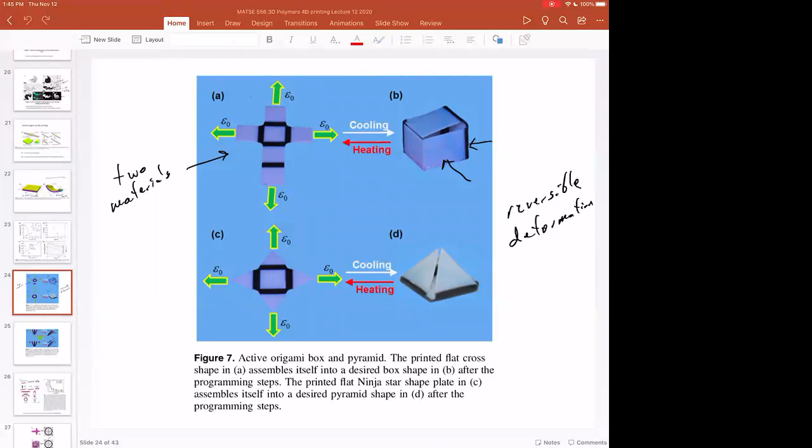And you can even start to see this in terms of phones that fold, or flexible screens, or morphing wings for aerodynamic control on advanced aircraft. These active and smart materials, this is really where the world is trending in terms of advanced products. And this is how those concepts are developed.

So this is a cool one right here, where rather than just folding up boxes and pyramids, and so you see these canonical shapes, this is a cool paper because they print this plastic airplane. It's not a paper airplane, but they print this airplane flat, and then they cool it down, and it folds itself up into a structure that can fly. And you can imagine that this might be very interesting for autonomous sensing, this might be very interesting for, say, environmental sensing.

So this is cool. And what's interesting about this specific example, if you read this, is that even something as simple as this folded airplane design has 2 opposite directions of curvature. So you have the center curvature, and they call that theta 0. So that folds up in one direction. But then the theta 90 degrees, so here, let me, right here - so this fold, or the center fold of a paper airplane, is in one direction. And then the wing fold, this theta equals 90, is in the opposite direction.

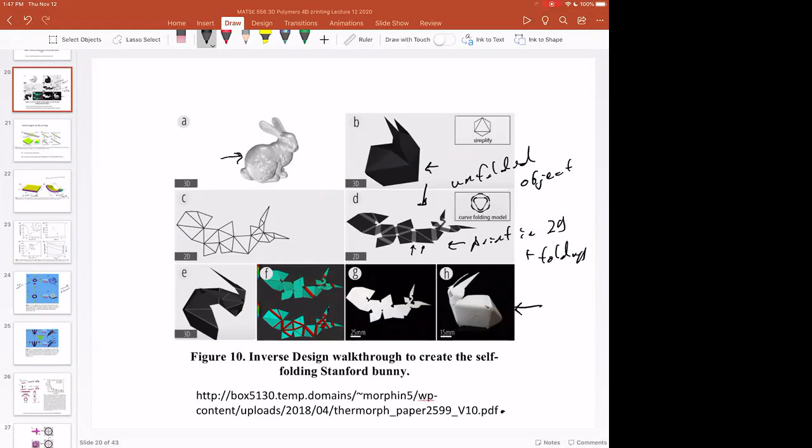So this is two different directions of folding, which is different than this single direction of folding in this rabbit example. And so there's lots of really interesting mathematics to think about what can you do with one direction of folding versus what can you do with bidirectional or two different directions of folding.

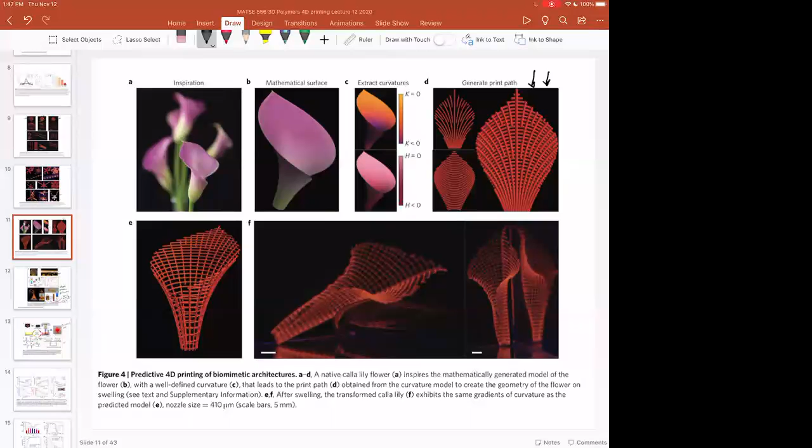And then if we go back to the example from Harvard, how do you get these complex curvature shapes? There's two different curvatures in this lily flower. How do you get that from a certain print path? And how do you get that from a flat object to begin with? So if you're interested in origami, there's a really cool Nova documentary on that. I'll try and put that in the discussion group if I remember. But this now is getting into how do you fold up complex shapes, or how do you obtain complex curvature from flat objects. And so there's a whole branch of mathematics devoted to this, and then material scientists and engineers and product designers and 3D printing engineers really make this a reality.

So that's a cool demonstration and something for you to think about as we move forward.

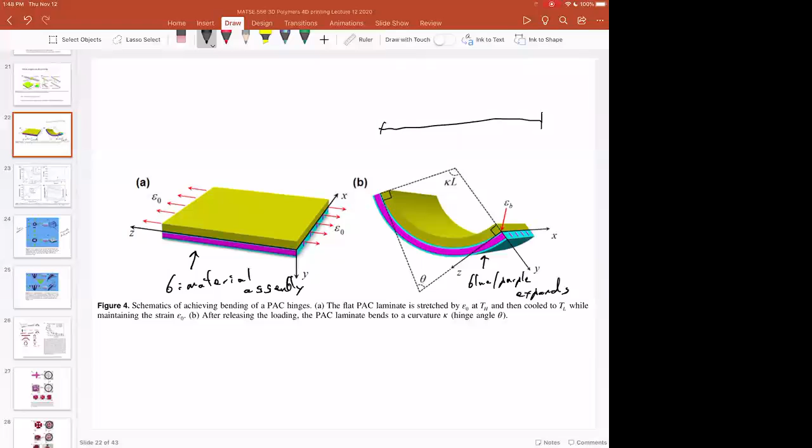So this paper right here, I just wanted to bring this up because I think we're getting to the end of these slides, although we're going to cover magnetics in a second. This paper really leverages the idea of bimaterial assembly, or in some cases, a bimetallic strip idea, whereas if you have two materials that expand differently, you can get bending moments based on that differential expansion, assuming the interface between the two materials is robust. So this is just outlining that idea.

And what's cool about this is that they use a flexible and a stiff material to do that, and they print under tension. So we saw a little bit of this in the ceramic polymer SLA example, where they were putting in wires in order to get curved shapes in pre-ceramic polymers that they could turn into curved ceramics. So again, it's using this idea of stretching in a smart way to get whatever radius of curvature they want.

And so that's cool. They've demonstrated all sorts of different parametric combinations of how you get these assemblies to curl, and how you might build something out of these folded or curled assemblies. So this is not necessarily 3D printing per se. This is taking a two-dimensional object like this pink elastomer here, something like PDMS or EcoFlex. They just make it pink so you can see what's going on. It's stretched in this frame, so it's elongated, and they print on

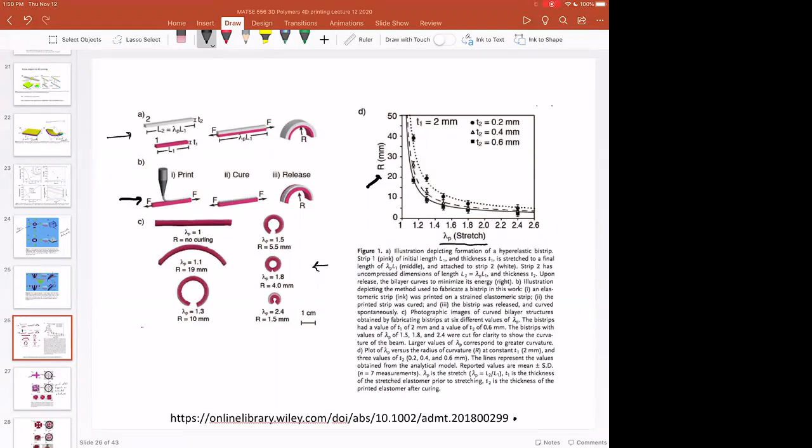So again, this is not a high-tech 3D printing demonstration per se, but being aware of some of these mechanical tricks, or mechanical techniques, can be leveraged in terms of multi-material 3D printing, or if you have a 2D printing process, how do you get three-dimensional objects from that. They showed all sorts of interesting things.

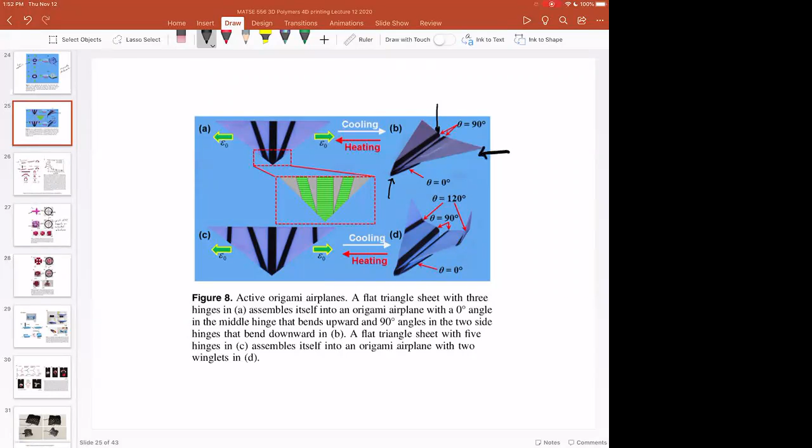Again, this is not groundbreaking in terms of a new 3D printing process, but this is exactly what people are interested in for 3D printing furniture, or for being able to ship objects that are flat, because you could ship a heck of a lot of these flat airfoils in a package, and then take them out, heat them up, and they pop into a three-dimensional shape. So whether it's shipping, concealment, or some other motivation, like only having a 2D process that you want to make 3D objects out of, this is something people are thinking about.

And it's worthwhile for those of you out there that are either mechanical engineers or don't know anything about mechanics and want to be exposed to some cool stuff. This is worth checking out.

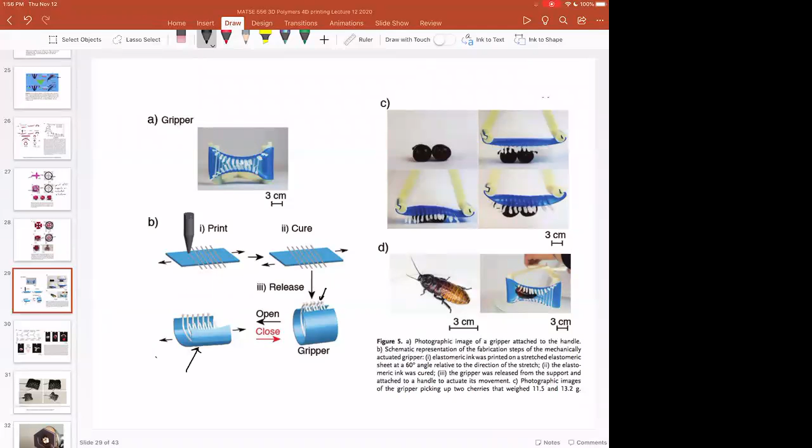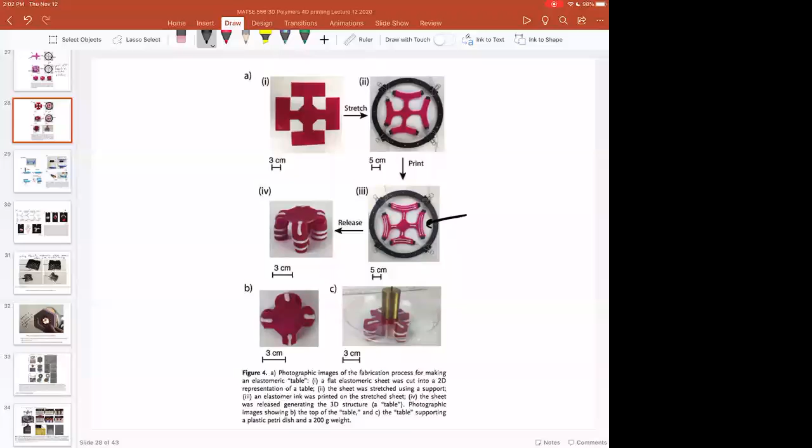something like this, this exact thing might not be very useful. And so, how do you take this basic knowledge and translate it to something that you can sell as a product or something that you can put on a building in the real world? Or this is just someone holding up a demonstration piece to a lamp at their desk. Does this work in sunlight? Does this work for tens of thousands of times? How can I take something that looks like this? This is just a lab experiment. And how can I turn this into a useful product?

And that's really the key part of how you translate engineering and scientific observations into something that's useful. But every technology started like this. I mean, there were people saying, I wonder if it would be useful to network two computers together. What might that be? In the 1970s, no computers were connected to each other. And then they thought about connecting computers, and then we had the internet.

Or someone in the 1950s observed the photodiode phenomenon or the solar cell phenomenon, and they said, wow, that's interesting. When I have this heterojunction and I shine light on it, it creates a voltage. I wonder if that's useful for anything. And so we have to remember that, or back in the day, the cave people said, oh, that lightning hit our forest and this thing called fire happened. I wonder if that fire is useful for anything.

And so I think we have to remember that just because someone on YouTube has shown this function, this is not necessarily ready for prime time, but this is how advances are made. There's an idea, there's an observation, and then we continue to refine and engineer and find the right material, and then eventually we're ready to go.

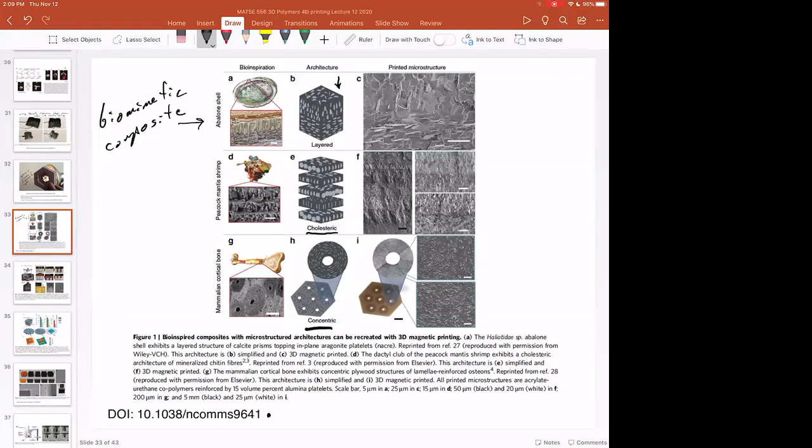But these biomimetic composites, like abalone shells or bone, have a structure that's key to getting the mechanical properties you want. The challenge for additive manufacturing is how you get this composite layered architecture, or cholesteric order—cholesteric just means the layers are turned in a certain order, like a liquid crystal. Cholesteric actually comes from cholesterol, which is a liquid crystalline material, but anyway it has a certain order to it, or this type of concentric order observed in bone and other things to give it strength. So the question is how to print ordered composites.

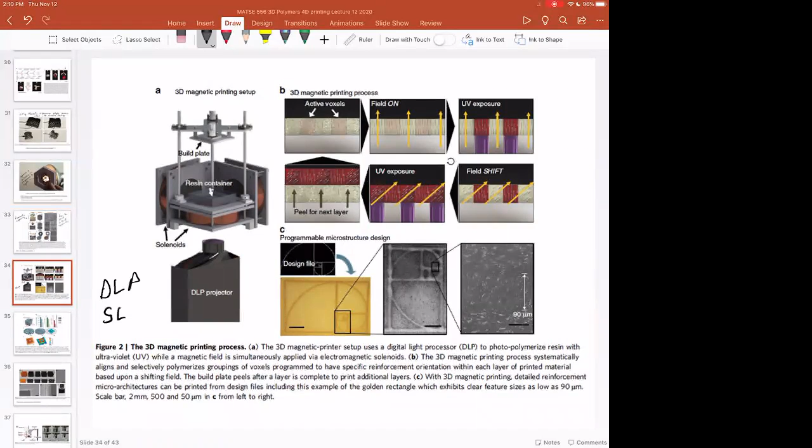One of the ways to get that order is to do stereolithography under the presence of a magnetic field. So we have DLP SLA—that printing technology exists, and all they did in this paper was put two magnetic coils on each side of the printer so they could orient particles in the field. They could turn the field on, solidify the layer with UV exposure, then turn the field off, or shift the field to get a different orientation, so they can create this layered architecture, or a cholesteric architecture where the orientation differs in different layers.

Eventually, if you do things right, you can get structures that have concentric order but also porosity in them. We know SLA has a general orientation—some layering happens if you use the right aspect ratio particles, and if I'm doing material extrusion AM, going back to the Harvard study, with fibrous composite materials you see the fibers oriented in the direction of the road. So there can be some order in these different printing processes, but this paper demonstrated how you can design or force order in SLA printed materials depending on the magnetic field.

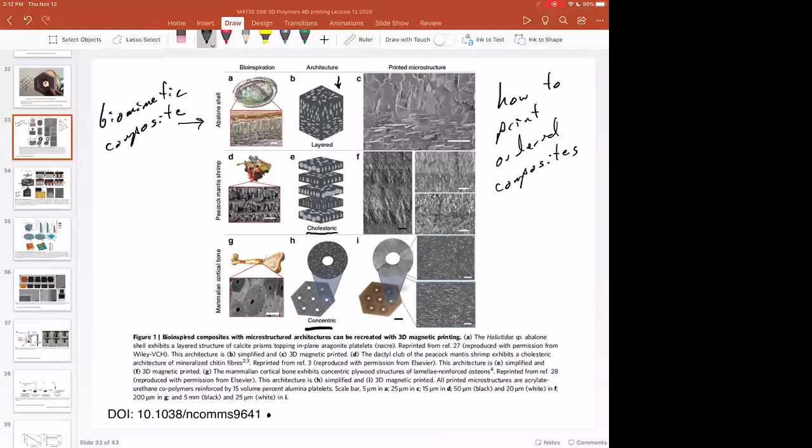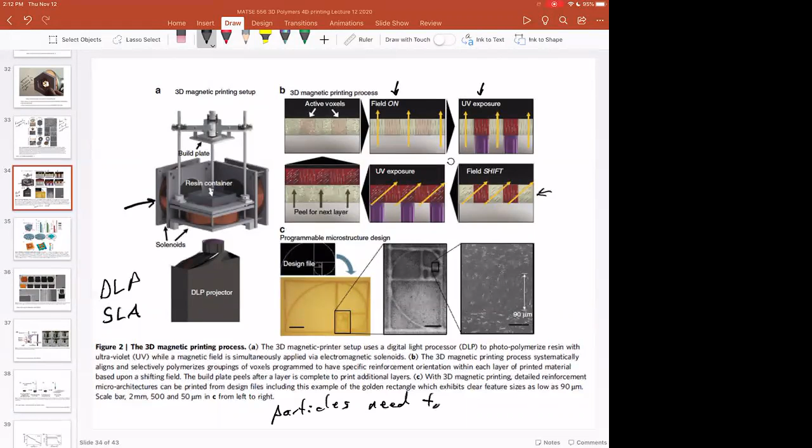This is a regular SLA resin with magnetically susceptible particles in it. I thought they used iron oxide—where does it say? Right here—so they use alumina as one, but I thought there was iron oxide in here as well. Anyway, you have to have some particles, and those particles need to be magnetically susceptible.

Everyone in magnetics knows that, but I thought I'd point it out. I think there's another example here that they're going to talk about iron oxide in a second.

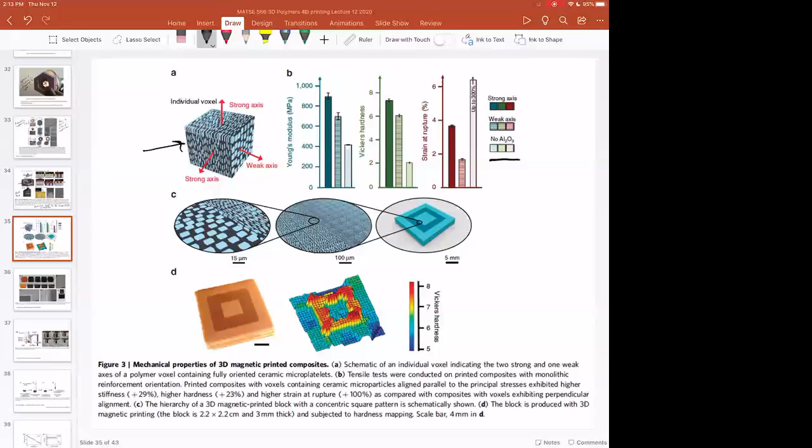This is cool because within a voxel, or within a solidified region of material, you can have an anisotropic composite and design that in. So you can print objects with different orientation in different places, rather than having to deal with the inherent orientation of the printing process itself. If you're interested in this idea of unique printing processes where you can create order within the material, you could check out this paper and some others.

This is one example here, and I know that this one is iron oxide. So you have iron nanoparticles, and it's at low weight percent, and so you can see that they get dark in a hurry.

So they can build these magnetically susceptible particles into an SLA print. And then what they demonstrated right here is that they used magnetic stimulus to actuate a gripper.

Oh, hold on. I can erase this here. Bear with me.

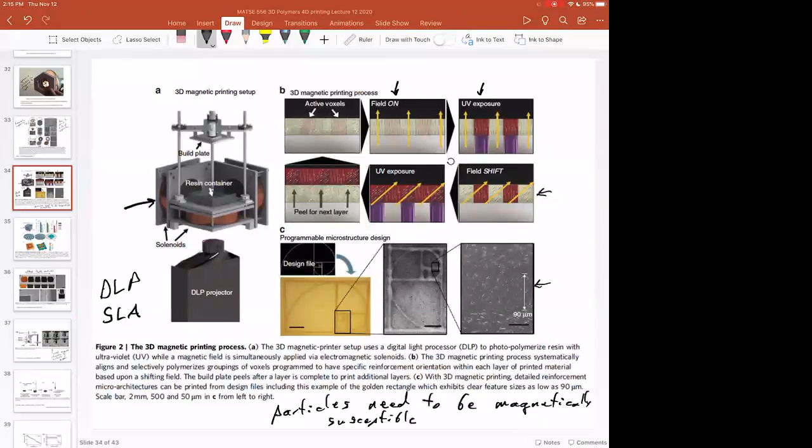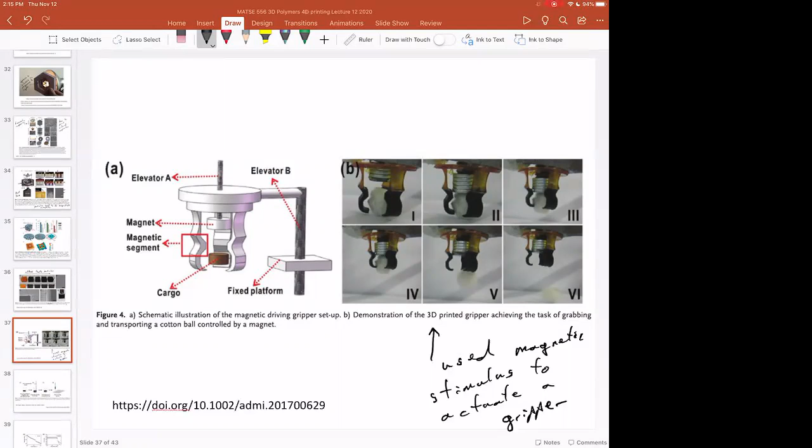In this paper, they use magnetic stimulus in order to order the composite internally, and you can see different ordered layers right here versus right here. In this demonstration, they basically built a magnetically susceptible device that could be magnetically actuated to pick up whatever they were interested in. So it's two different sorts of ideas for using magnetically responsive materials in different ways.

And what's cool is there's a lot of different applications for this. Using magnets to move stuff around, that's fine, that's a nice demonstration. But even in this simple example, what they did in this paper was direct ink writing.

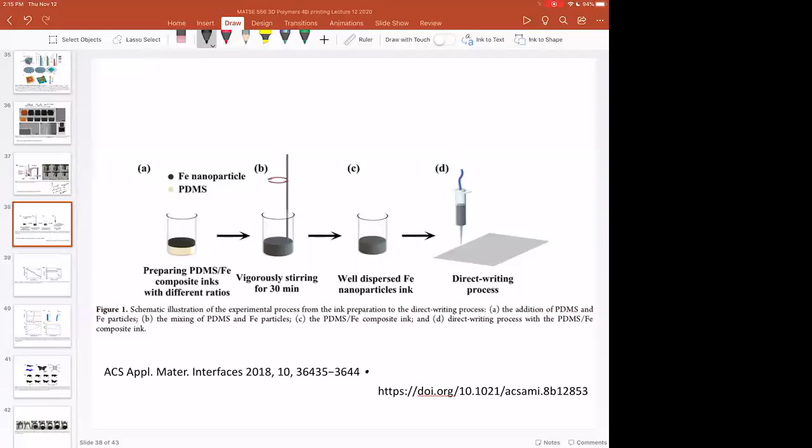Again, this is material extrusion AM. And all they did was make an iron-filled silicone, which is what PDMS is. So now this composite is going to be stretchy, and they're going to build a composite component using additive manufacturing that's both magnetically susceptible and stretchy.

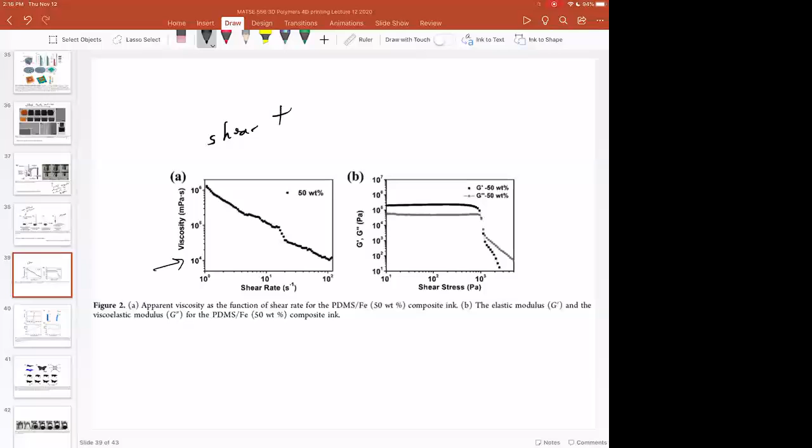This is nice because they characterize the viscosity as a function of shear rate. So we go back to the basics. What is it going to take to do material extrusion AM in direct ink writing? They have a shear thinning fluid.

And they have high viscosity at low shear rate, showing thixotropic or zero shear behavior, or Bingham plastic type behavior. So you'll be able to create objects that are static, and you can cure them because you have to cure that. And you see the modulus as a function of shear stress, showing high modulus.

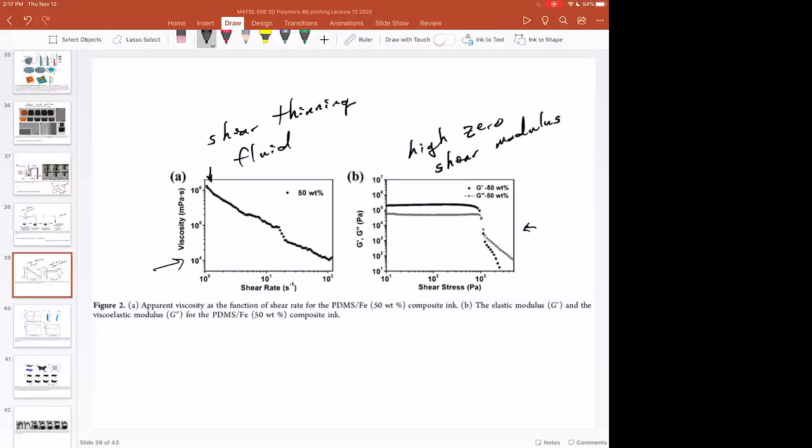Which will enable printing, the same things we talked about with material extrusion AM in direct ink writing. So they characterize the bending angle that they can achieve with this, and they characterize the magnetic susceptibility if you're interested in things like that. That's just all the basic material characterization.

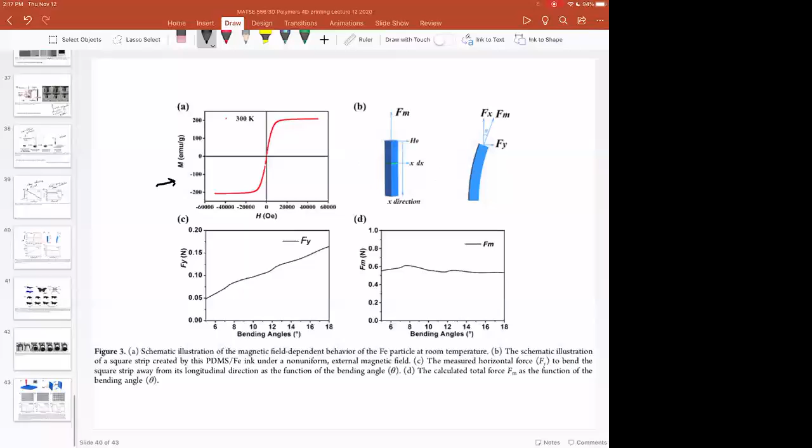What they did with this process was create a butterfly that flaps. Okay, that's very nice, but that's just a demonstration. It's not as useful as making a gripper. By removal of the magnetic field, you can grab the object. That's very interesting, but we've seen that before.

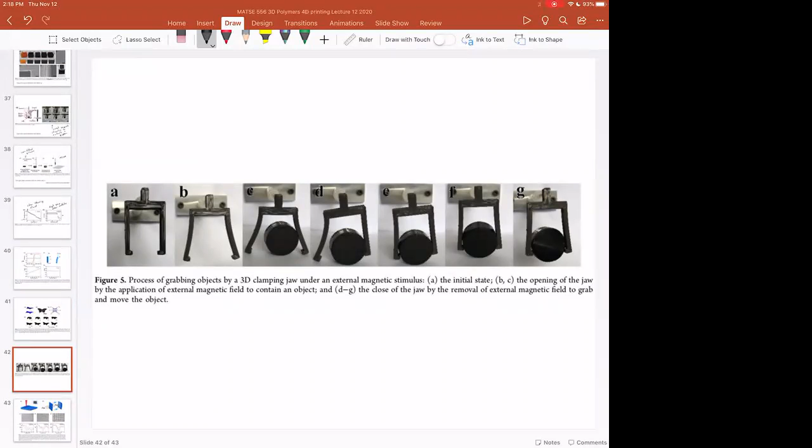And this is a little bit in the weeds, and of course I'm not a terahertz electromagnetic antenna engineer, but this is cool. You're not doing something like a little demonstration of gripping something magnetic, but you're changing or morphing the antenna using a magnetic field in order to get a different bandpass in a really interesting frequency regime.

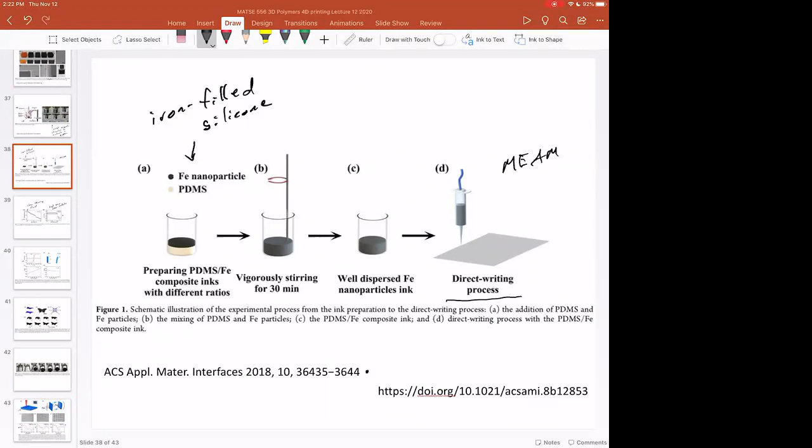So being able to play a role in how you formulate the ink, being able to play a role in what type of nanoparticles to use, or being able to say you really need to do your direct ink writing like this - it would easily take 3 or 4 of us in class to make this a reality, rather than an antenna engineer saying, well, it would really be nice if someone would invent this technology, because I know by theory this bandpass in the terahertz will work.

And so this is where we need to get comfortable with each other's skills and be able to access those when we need them. So Anna, if I'm completely wrong about this terahertz bandpass filter, feel free to email me and I will issue a correction. But this caught my eye because now this is a lot cooler than a flapping butterfly or some magnetic gripper to me, and it turns out there's lots of stuff out there like this.

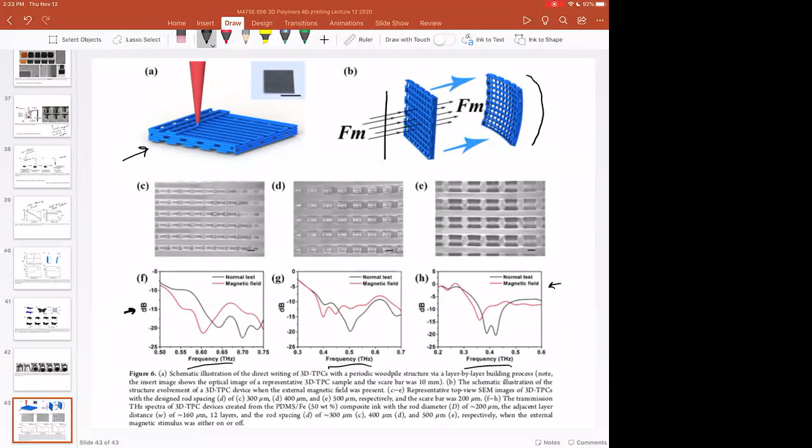Any other questions or comments on this? Okay, so that wraps up PowerPoint lecture 12. So if we go back to Box, we are going to switch over to lecture 13.

I've had a lot of questions in the last few weeks on, is this economical, or should we print this? I think even in class we had some discussion of how do you know you should print it, or what's the idea with printing? So I just wanted to put together a couple slides in terms of process and economics, and thinking about what the ramifications are if you decide to print something or not.

So there's this famous plot right here, and if you're interested in the source, it's right there. So if we're a company and we make rubber duckies - this is a kid's toy that goes in the bath, made out of plastic - there are, let's say, 2 ways that we can make this thing. We can have an injection molding factory and injection mold this, or compression mold it, however they're done.

So this is a conventional industrial process. Great, we've got that. Or let's say we want to push the envelope here - we could 3D print this duck. And let's say they're the same: customer acceptance would be the same, looks great.

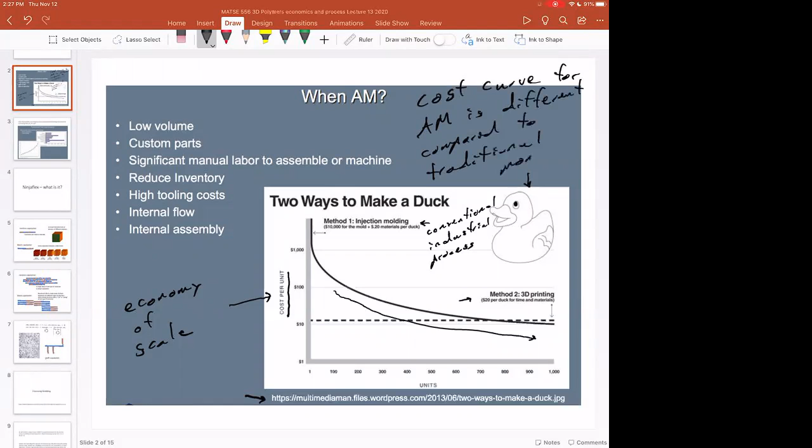There's some argument about what is the shape of the curve for 3D, because of course you need to buy a 3D printer, you need to site it, there's some capital cost in there, all of that stuff. But in general, the community consensus is that the economy of scale slope, or the slope of this line, is a lot different for additive manufacturing than for conventional manufacturing.

When you have lines of two different slopes, in general, they're going to cross somewhere, and they cross at a certain number of units. The question that a lot of people are asking themselves right now is, where do these lines cross?

And if you think about the hearing aid example, the real question is, where do these lines cross for the entire industry? When does it make sense for the industry to do something completely different than what they did in the past? That's hard to analyze. There's a lot of different factors that go into that, but this is the very simple picture in terms of, I can make products using conventional manufacturing, or I can make products using additive manufacturing. When does it make sense to do what?

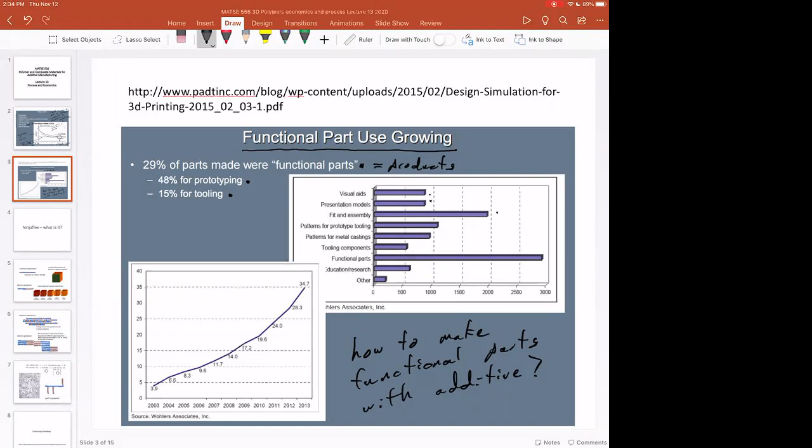We'll talk a little bit more about this different process and about the economics around it. If you have questions around economics, and you have questions about how do I know when to additive something, there are classes for that. So, like I said, we won't get deep into supply chain issues, or develop our own cost models for this. But I wanted to give you some appreciation for why you should additive and when, and we'll develop that a little bit more. I'll skip the NinjaFlex for now. We'll come back to it.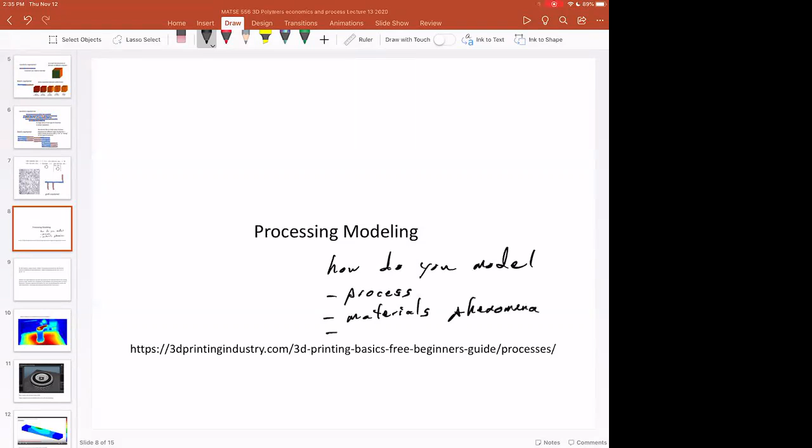I wanted to talk a little bit about process modeling, to follow along on topology optimization that we talked about last time. The question is, how do you model process? That's obvious. But you also want to model materials, and you want to model composite components.

We saw a little bit of this in big area additive manufacturing when they were making the Strati. Oak Ridge had worked on their thermal model for residual stresses, so they had a nice process model for that. But people would really like to develop these process and materials models for lots of different additive processes. It's complicated because right now we have some models for materials, we have some models for composite components, but modeling the additive process, there's a lot of detail that goes into there. You've seen some of the examples in terms of thermal history. How do you replicate that complex thermal history? Or orientation, depending on the tool path.

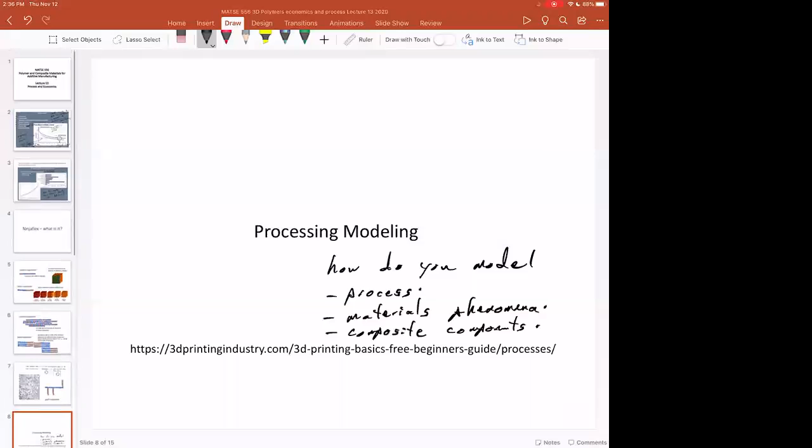So if we go back, let me go back to lecture 12, and I'll bring up this example again. Because the fibers have orientation, so there's orientation in the roads, but then the roads are oriented themselves. Depending on both of those things, of course, that's what's leveraged in order to get this complex curvature. But the tool path, or the direction in which the roads are put down and the way that the roads are facing, gives you this second level of ordering that you have to take into account in the modeling.

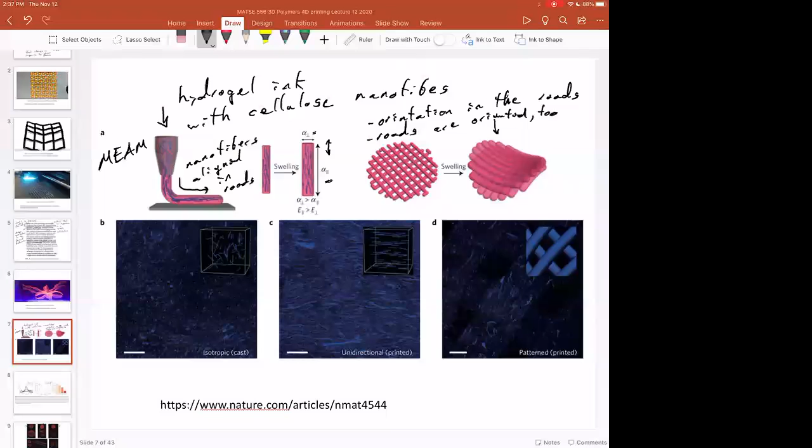Of course, they developed a curvature model for this demonstration, but how do you do this generally? How do you develop a process model that takes into account all these different levels of orientation? Let me get back to my slides right here. So when we talk about developing a process model, that's what we're talking about.

And people are taking a shot at this. There are papers out there, and this is just one in there from the Rapid Prototyping Journal. You notice that this is 1996. So there are modeling frameworks out there, but they have to be deployed across whatever process we're interested in. It's not like everything in additive is brand new and we all have to develop it from scratch, but there's so much complexity that it takes time in order to deploy some of these theoretical and conceptual frameworks for modeling the things that we're interested in. This is just a really nice discussion, and I like it because it's at least an older paper in terms of additive manufacturing.

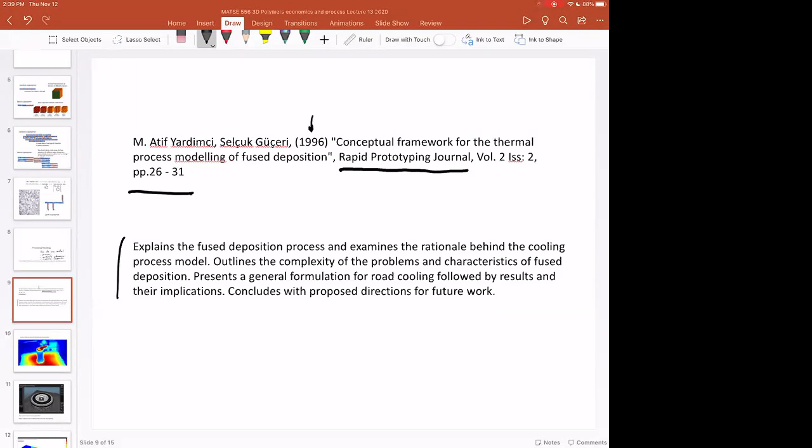The complexity of the problems in even something as simple as fused deposition modeling. You can read this paper and start to think about what Joe Bartolai and Tim Simpson have done in terms of road fusion and the physics of molecular interdiffusion and getting good road fusion, versus what they've done to compute residual stresses in big area additive manufacturing. So this is a nice sort of discussion of that.

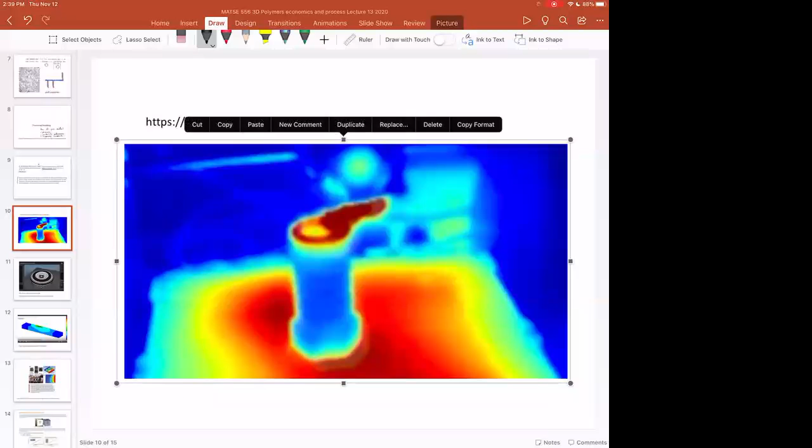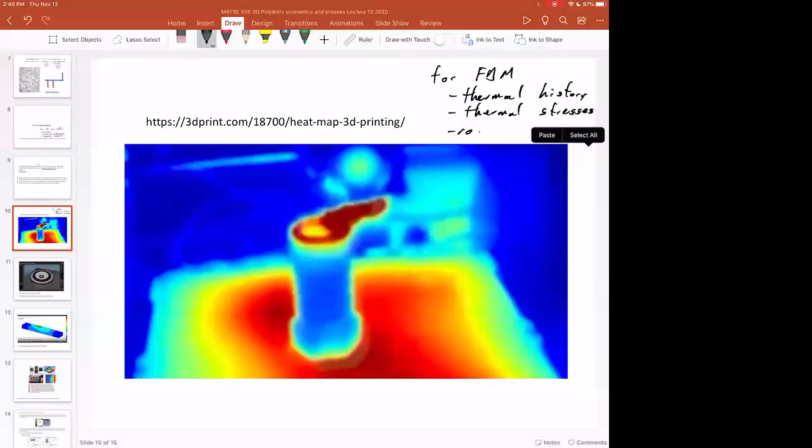If we're talking about fused deposition modeling, we really need to think about all the thermal stresses in the material and the thermal history of the material. So we have at least four aspects of FDM: thermal history, thermal stresses, road adhesion, and of course we've got orientation. Oh, that's, no one's going to be able to read that.

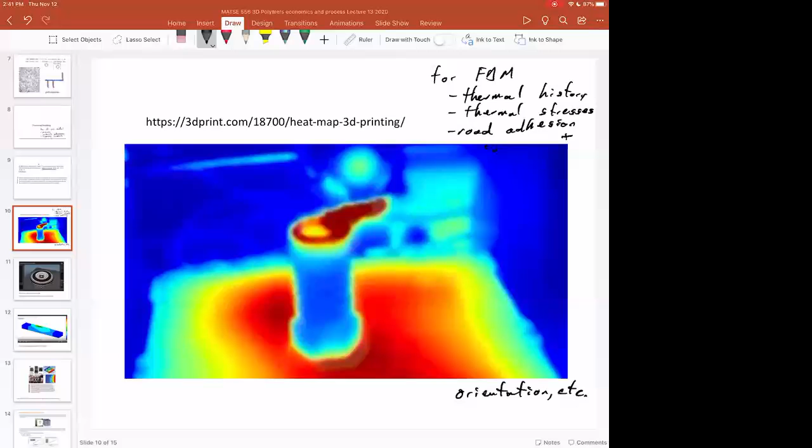Plus etc. So this gets complex very quickly, and we can make a similar list for stereolithography, for SLS, not with all the same factors but with the different aspects of the process for PolyJet, etc. These are things we can talk about in detail depending on the class's interest, or things you can develop in your own work or issues you need to think about if you take this on in your own research. So this is just one example of how complex the heat maps are.

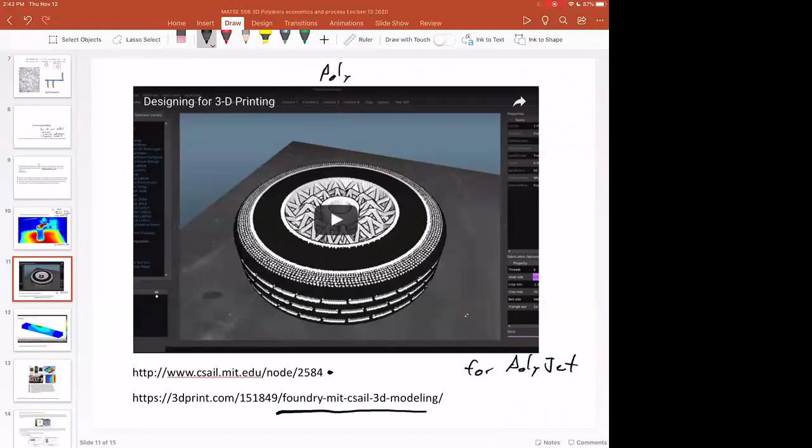One of the interesting things people are working on is how do you develop composite models for 3D printing. This foundry modeling from MIT is really built for PolyJet. We saw in the 4D printing examples that they were using a PolyJet printer to get their 4D printed responsive structures. So now this is PolyJet hard plus soft material, so it's Vero White and Tango Black.

If you have two different materials, and if you have a PolyJet printer, how do you design something as simple as a tire using hard and soft composite materials when you can put those two different materials anywhere you want? What sort of modulus do you want, what stiffness, and where? Of course, in the center of the wheel where the hub is, this needs to be stiff, and so that's going to be Vero White because that's a stiff material in PolyJet.

But you notice out here on the sidewall of the tire, this is a composite, because it can't be completely rubbery on the sidewall since the sidewall has some mechanical function as well. If you look at a tire, we have belts - what used to be called steel belted radial tires - that's the reinforcement in a rubber tire. If you've ever seen on the highway those wires sticking out of a disposable tread on a semi-truck tire, we have steel belts in all our car tires. If you cut them open, there's steel in there - that's what steel belted radials are, a composite of steel wires which reinforce the rubber structure. And of course we have rubber on the outside because we want the tires to stick to the road.

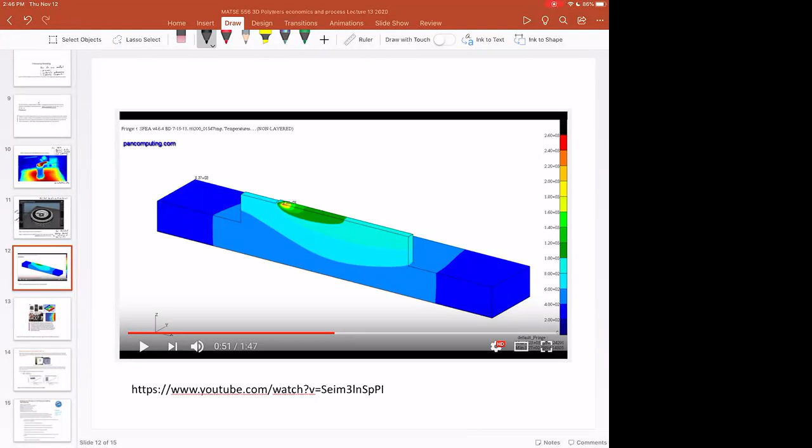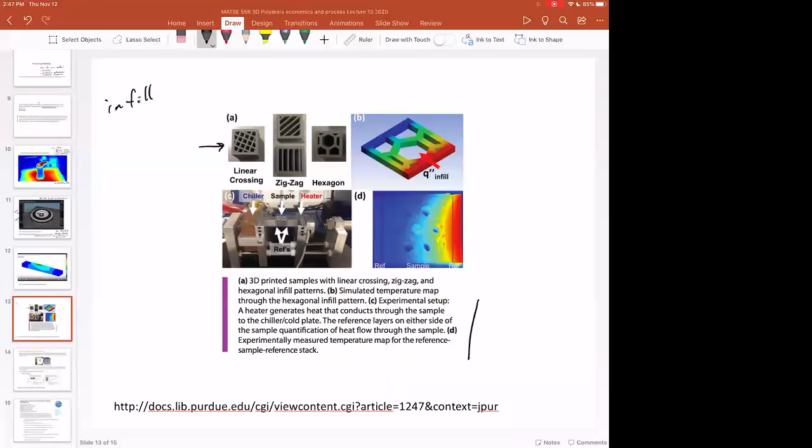I think we'll skip this - this is just one example, and I think this link is dead, but I have to check it. What's important is thinking about how different design inside the shape can influence the performance of the device. We talked about this in terms of mechanical properties, and of course the infill will influence mechanical properties.

And mechanical anisotropy. But the infill can also influence thermal properties.

Thermal. So when we think about all the different things that go on in additively manufacturing a part and all the different properties that we want, we see heat flow, or this Q double prime in this case. The heat flow across the sample really depends on what the infill looks like, how it's connected.

We can do a thermal simulation to figure that out. And of course, in a conventionally manufactured part, we might just have something solid or something hollow. But we could never put in this linear crossing or zigzag or hexagon. And so not only are we designing for metamaterials in terms of mechanics, but we can have thermal metamaterials. We can control the propagation of thermal gradients across our component, depending on what the infill is. And this is a real advantage of additive manufacturing.

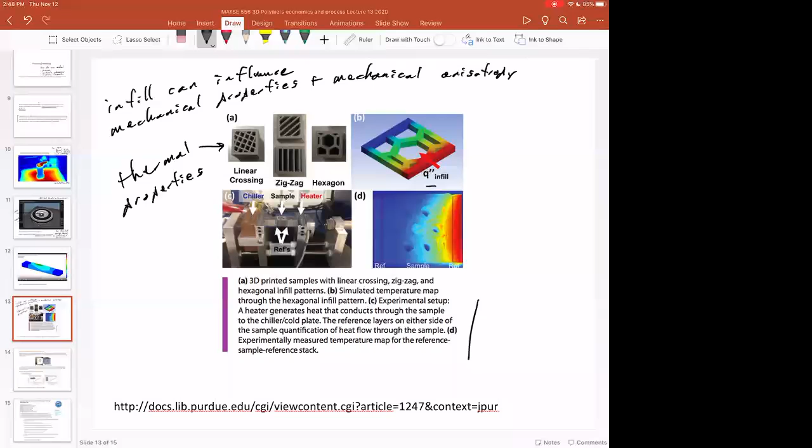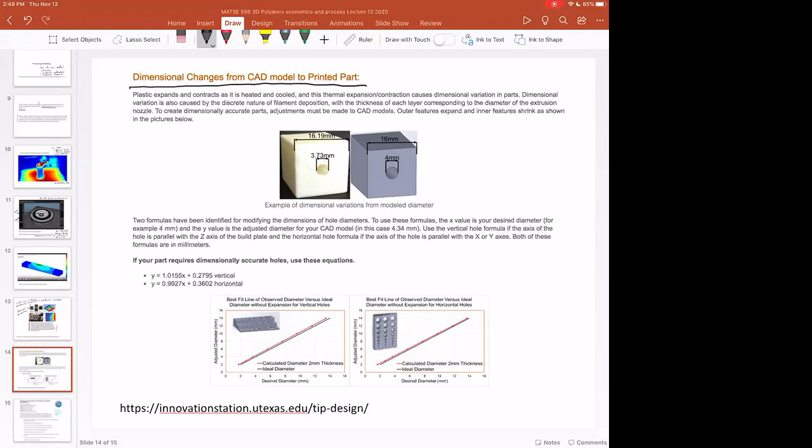Oh, this is just one last slide that I'll talk about in terms of shape fidelity and process. And so when we think about design software, so we're thinking about design to reality with CAD software that knows about the printer. The CAD software can be a lot more realistic in terms of what the actual printed part is going to be. And so we discussed this before in terms of here is the CAD model.

And so that's the desired shape. This is the actual model. That's what you get. And so you can create a calibration curve for that, or the software with knowledge of the process can create a calibration curve and adjust the dimensions of the model in order to get something that has a lot more shape fidelity to what you might want, rather than you saying, okay, printer, I need something that's exactly 16 millimeters wide with a 4 millimeter diameter hole in it. This is what I want printed.

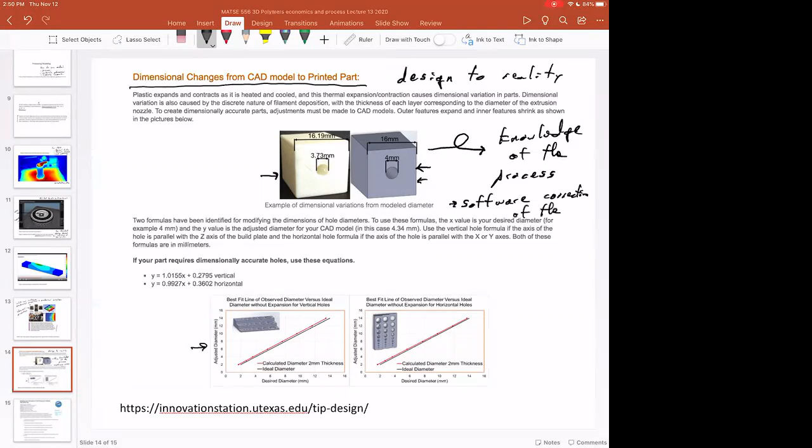Of course, the printer is going to give you something different. But if you could take this CAD model with knowledge of the process, you can have software correction of the geometry for successful printing.

So again, this is, oh, go ahead. I was going to say, I think there's some companies that do something kind of similar, like Markforged, their Metal X machine. They do something kind of similar where you give them the model and their software adjusts because it's an extrusion based process with metal powders, but their software oversizes the print so that when it sinters and reduces size, it's back to the initial model. So it's similar. Yeah, Kyle, that's a great comment.

And so this Markforged printer, like you said, they have to sinter it. Does the software do the anisotropy where different pieces of the component have different shrinkages, or is it an isotropic model, or do you know? I'm not 100%. I just know that's one of the things that they tout when they're advertising, that their software handles it to make it back to the original model. So I would assume it's per feature. I don't know. That sounds like a lot of work.

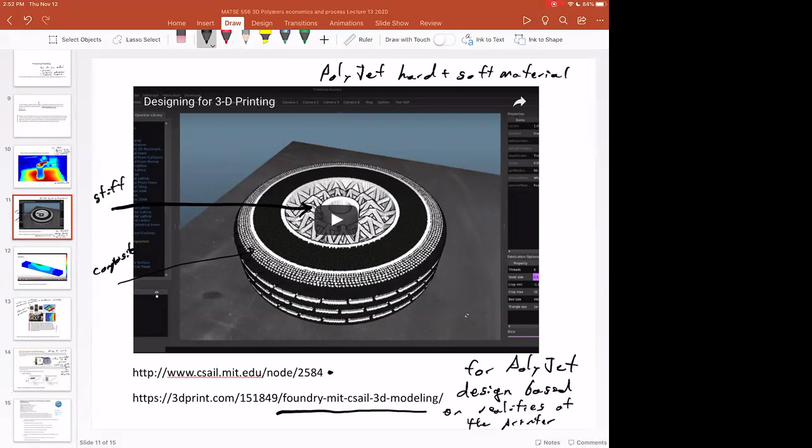Yeah, well, no, that's exactly, and I appreciate that. I didn't exactly know about Markforged software, but that's exactly the genesis of this idea, that the design software now knows about the printer. And so whether it's a proprietary software like Markforged that's built just for their printer, or it's an open source piece of software like Tinkercad that you have a FDM drop down, this is the process I'm going to use, or SLS, this is exactly what companies are doing to make additive manufacturing more useful. So I'll look up that Markforged software, and it's likely that they're trying to build in per feature with the anisotropy. But like you said, that's computationally very intensive, and there's a lot of variables in there. But I would encourage you all, if you're interested in this, to look around and think about how the software now can adjust with knowledge of the printer.

That's a good comment, appreciate that. Any other comments? Okay, I think we'll leave it here.